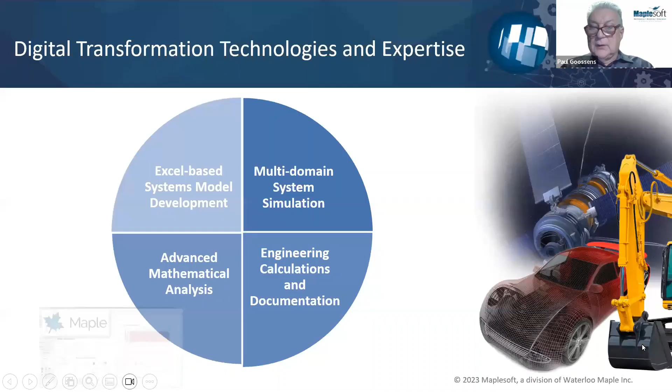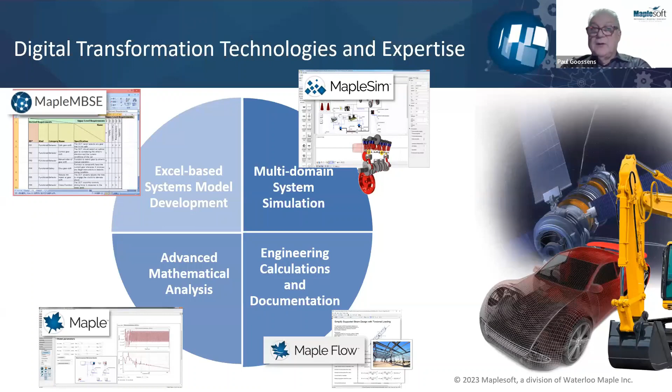So just to get started, I thought I'd start with a bit of an introduction to Maplesoft as a company in terms of its tools and also its expertise, because this is actually core to this presentation, that Maplesoft is more than just a product development company. It actually does have a significant number of software engineers, systems engineers that can help our customers to be successful with our tools. And certainly, that's kind of at the core of our engineering solutions capabilities.

So really, this discussion is going to be much more about how our technologies and our expertise can be used to get value from calculations, or managing calculations and analyses within your own organizations. Really, what we're talking about here is helping our customers to be successful in their digital transformation of their engineering processes through the use of our tools and our technologies, and of course our expertise.

Because we'll be touching on Maple and Maple Flow in this particular presentation, I just want to spend a little bit of time talking about what Maple is, and also talk about Maple Flow, because that's a relatively new product for us.

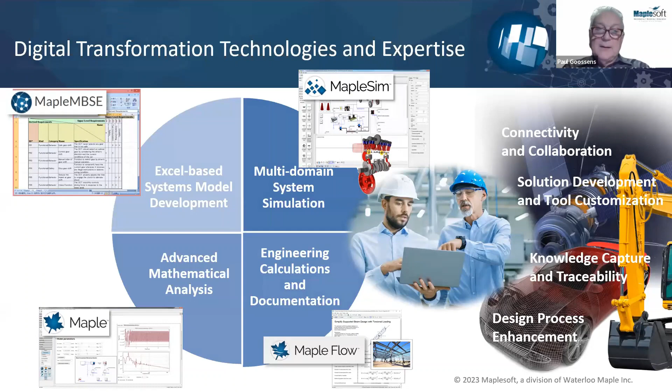Maple is our core technology. It's a powerful symbolic engine married up to a user interface that allows our users to turn mathematical concepts into solutions through the symbolic processing and manipulations of those expressions, to get them into a form that can then be executed by plugging numbers in. But the critical thing here is that you can actually capture the knowledge behind that solution all the way back to the initial principles, the initial relationships.

That's an important factor of our tools, and it's actually one of the things I'll be talking about a lot in this session. But it's much more than just a mathematical manipulation tool. Maple itself is a language, a programming language. It can be used to develop algorithms and routines that are very powerful.

You can combine that with user interface components in order to build deployable solutions that don't require the end user to know anything about Maple.

So really, we're providing an environment where you can go from basic principles right the way through to a canned solution that could be deployed either with Maple or through our web publication tools, Maple Cloud.

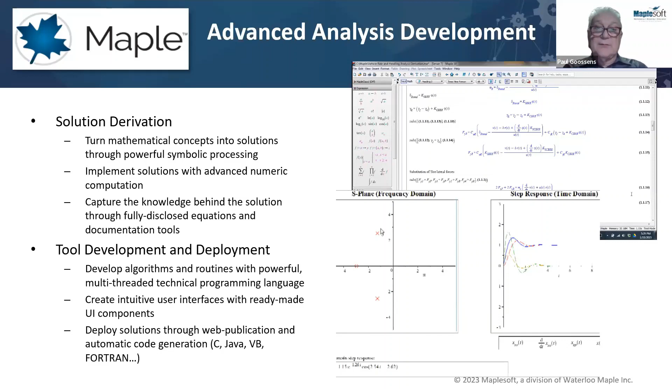Maple Flow is kind of the other extreme. It assumes that the equations, the expressions, are already derived, and it provides a sort of calculation document tool that allows you to place your expressions wherever you want on the page, and build up what are effectively live technical documents. Calculation documents, largely targeting our design engineers and scientists, who really all they want to do is take already existing equations and implement them in an environment that looks like a live design document.

I won't dwell too much on the details here, but the idea is that you can combine mathematics with text and graphics, and of course it still uses our very powerful dimensional analysis, dimensional units capability, to keep track of units throughout the calculations. Again, that's a very important factor for our technologies. And actually, under the hood, the Maple kernel is still there, so you can actually access a lot of the Maple power from within the Maple Flow document.

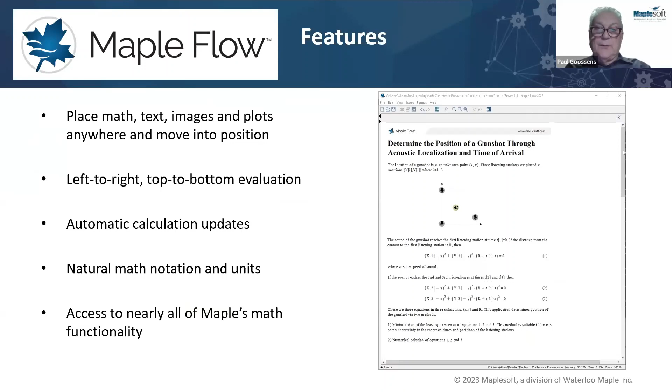So that's just to give you a bit of an introduction to what these tools look like, being used by many customers, engineers, and scientists throughout the world.

For many larger organizations, I particularly tend to get involved with some of the bigger companies that are very complex, designing complex products, and trying to understand what it means to integrate many of these processes together in order to achieve digital transformation initiatives in their business.

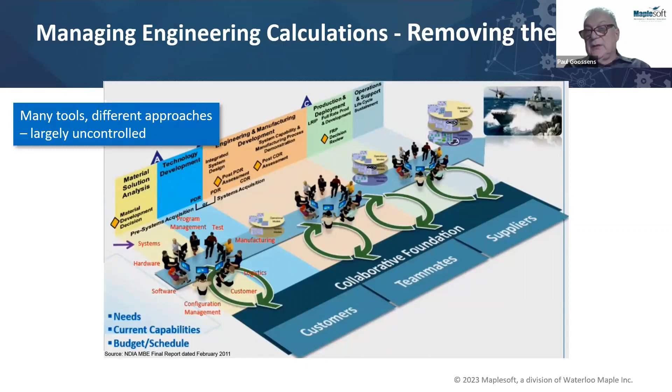And the big challenge there is that these organizations tend to get very siloed, with many different tools and approaches—largely uncontrolled. Most of the knowledge resides with subject matter experts, and that can easily be lost if that SME leaves the organization for whatever reason.

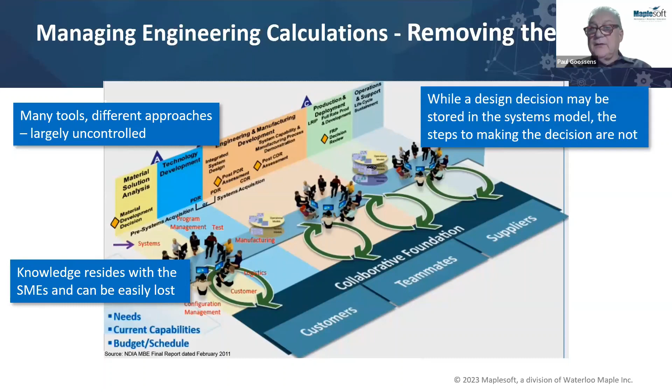The design decisions can be captured in many respects, typically in systems models, but the actual steps to getting to that decision are sometimes lost.

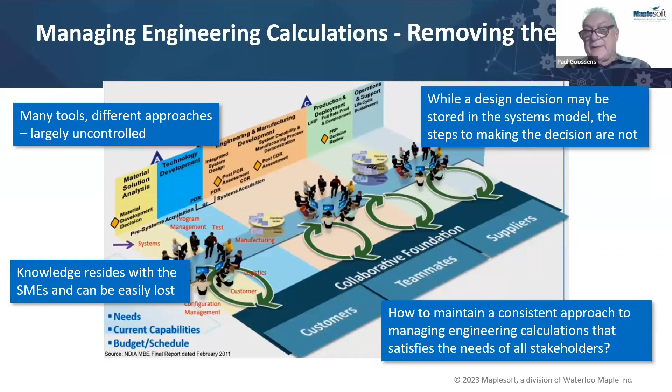So the challenge is, how do you maintain a consistent approach to managing engineering calculations that satisfies the needs of all stakeholders, because everybody has different interests and information gets siloed for a reason. Is there a way this can be managed that benefits all stakeholders? This is where we are coming from.

Certainly in the context of design calculations, which is the sort of expertise we've built our capabilities on, we get exposed to information coming from many different parts of the organization that need to be brought into the design calculation.

So these could be requirements coming from a systems engineering tool. They could be simulation analysis management coming from, say, a PLM system. It could be design parameters captured in a product data management tool, or even external information coming in from elsewhere in the supply chain. All of this has to be brought in and effectively tracked in order to create those calculations.

And then, once the results have been generated, how do you manage those results, and what generated those results? What were the circumstances for doing that? Any design decisions have to be captured in that way as well.

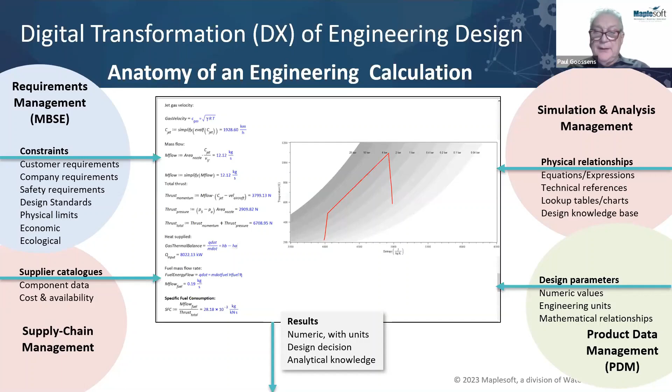So under the hood in our Maple technology, we have amassed a considerable wealth of capabilities that allow for tighter integration with other tools within your organization, whether it's file-based or databases, dedicated simulation languages, or just code. We can handle all of that.

The one I'm going to talk about more today is our online connectivity—our TCP/IP backend, and our recently launched Open API that allows us to configure the API for any REST-based web service. This is critically important to a lot of the activities we're involved in.

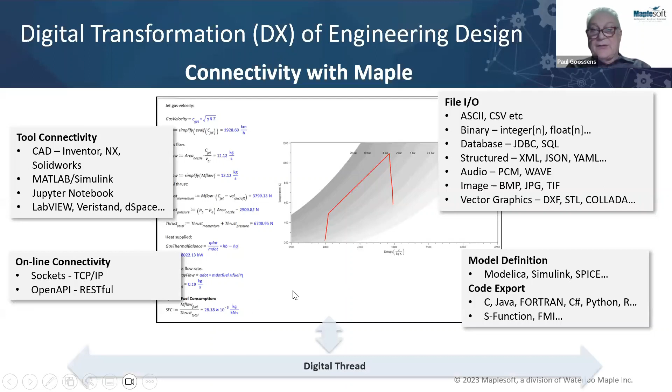What this actually means is that now we have a way of connecting all this information, all this capability, into the broader organization through what's often described as the digital thread. The critical thing is that the knowledge that went into developing all of this is now encapsulated in a way that can be deployed and reused within the organization. That's the goal of what we're trying to do here.

How do we do it? Well, we have this thing called Maple—Maple's kernel. We use it in our own tools as the mathematical engine, obviously in Maple Flow and Maple Sim, but we can use it for third-party tools as well. So we have the ability to integrate, for example, with Python, but also with MathWorks tools and so forth.

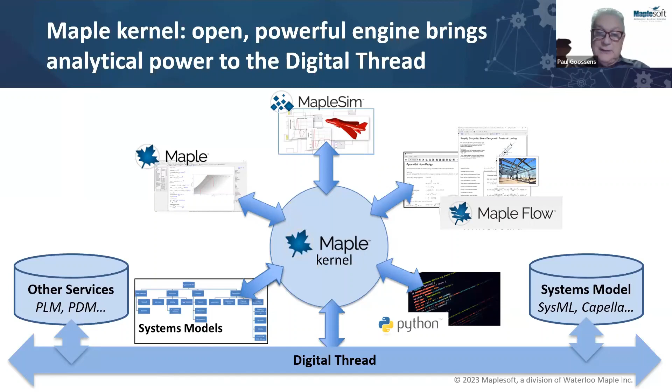What we want to talk about today is how we can tie that capability into systems models—into the architectural models created using languages like SysML and Capella. The reason we see Maple bringing value into this particular domain is that we can handle equations.

We can handle not just equations but expressions. We can combine them, simplify them, and causalize them, so you can determine what are the unknowns and what are the knowns much later in the process.

We can handle constraints and inequalities. We can actually do consistency checking, so we can see if there's missing data or inconsistent data that's going to cause not only an error in the calculations, but should be flagged as an error in the design.

And we offer a wide range of analytical capabilities. I'll be talking a lot about our units handling, because I think it's critically important that we can do this, and it's not just basic conversions. We are handling engineering units at the dimensional level. That means it's much easier for us to do conversions, but it's also really useful for error trapping. It's quite amazing just how many calculations actually deliver inconsistent dimensional units. So we use that a lot.

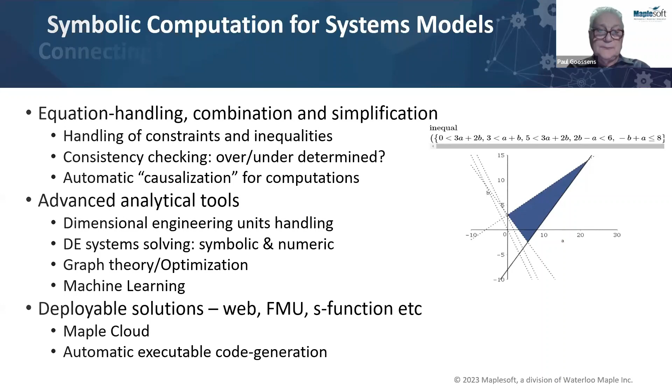Okay, so this brings me to the topic of today's discussion, and that is we have recently - I'll describe it as a soft launch - launched the Maple connector for SysML. This is an add-on library to Maple that allows us to interface the Maple engine to parametric information within the systems model. At present, we support Teamwork Cloud. We are exploring other MBSE platforms, and this is really the purpose of this presentation, is to start generating interest in how this tool could be used and what other platforms we should be considering.

As many of you probably have heard, there is a new implementation of SysML coming out, I'll say early 2024. We're looking very closely at that. There are some aspects of that which I'll talk about later in this presentation that actually make it a very natural fit for the kind of work that we're doing.

And just to close off this whole discussion of integrating with systems models, I do want to talk about the work that we're doing with Zuken and Vitech. So we have been working on an integration with their GENESYS systems engineering tool. We completed that early in the summer, and it's now being presented. It'll be presented at the Zuken Integration World Conference in Japan next week.

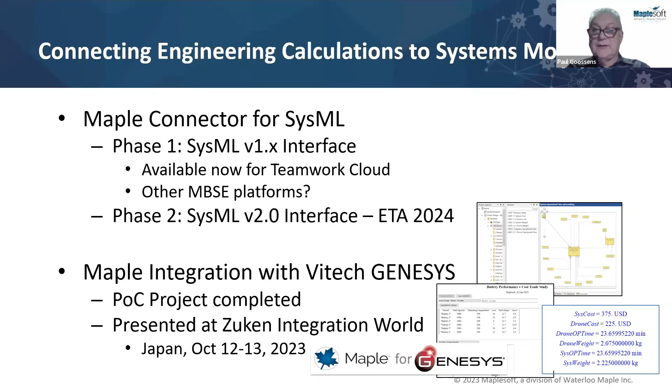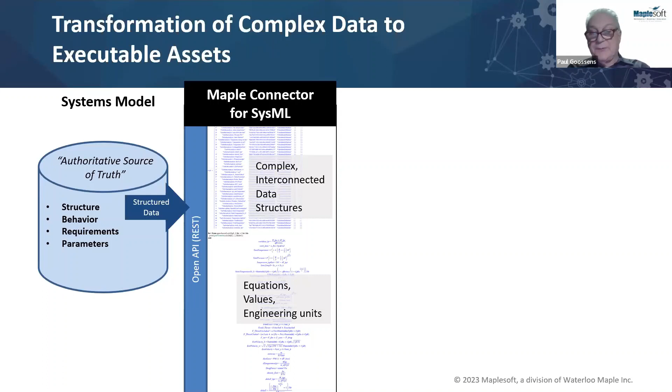So what do we mean by this? Fundamentally, what we're doing with the systems model is that we can access the structured data from within the source of truth, the architectural model. Typically this will be found in the parametric sections of the model. But the important thing here is that we can grab that structured data and then extract out any explicit expressions, any implied expressions, just in terms of what the structure of the model is telling us about the mathematical relationships that are in there. So there are some inherent mathematical relationships that we can derive from that. We can grab the parametric values and their engineering units.

And we can take this a step further. We can actually generate code from those expressions. But the important thing here is that we can turn these into what I would describe as executable assets. So now we're taking knowledge or information that's residing in the system model and turning them into something that we can actually perform some calculations with and make some design decisions from - whether it's equations going into the Maple Flow environment, or expressions that are going into the advanced mathematical analysis of Maple. Indeed, we can even extend this to generate Modelica models. We don't have that just yet, but it's definitely a possibility.

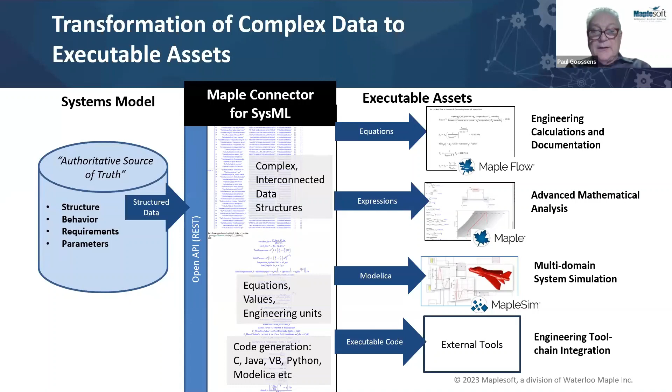And of course, we can take executable code, and that can be integrated into any tools beyond our own. So the idea here is that these assets can be extracted from the system model, some kind of analysis performed on them, and then conversely, we can take any results that come from those analyses and push those back into the system model, if it makes sense to do that. But now, really, certainly in the context of systems models, we have a very, very solid way of being able to integrate engineering data into the digital thread.

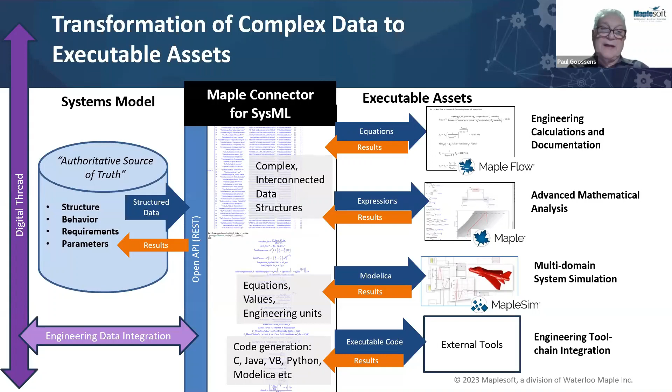I'll pause my presentation there for now and just show you what this looks like.

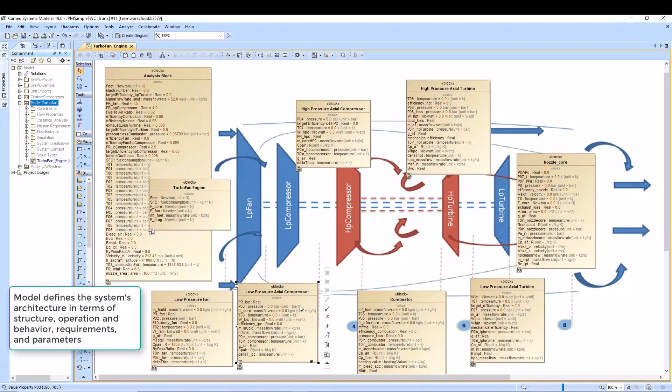In this demonstration, we're working with this system model of a multi-stage jet engine. This is how it appears in Cameo Systems Modeler, residing on the Teamwork Cloud server. It contains the system design in terms of requirements, structure, behaviors, and design parameters.

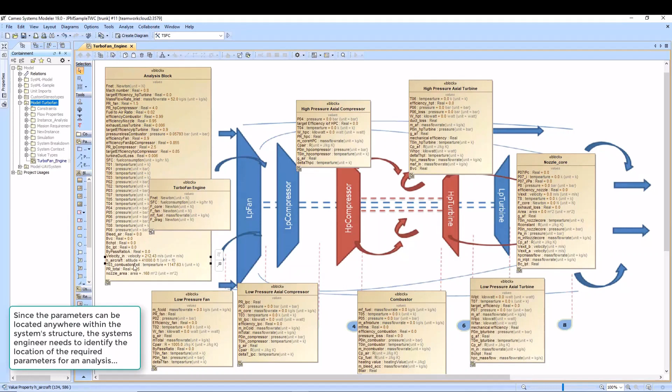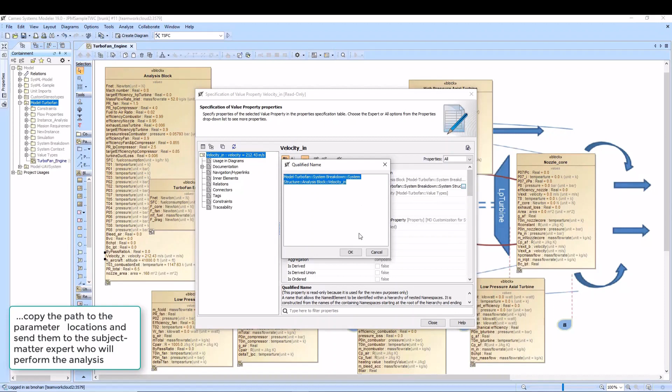These parameters are in the respective subsystems, and we're going to use these to perform an analysis in Maple. To do that, we need to know the location of each parameter from the systems engineer in charge of the model. The locations are found by inspecting the value properties for each parameter and locating the qualified name - effectively a path to the parameter - and each path can be copied and sent to the engineer doing the analysis. Now let's go to Maple.

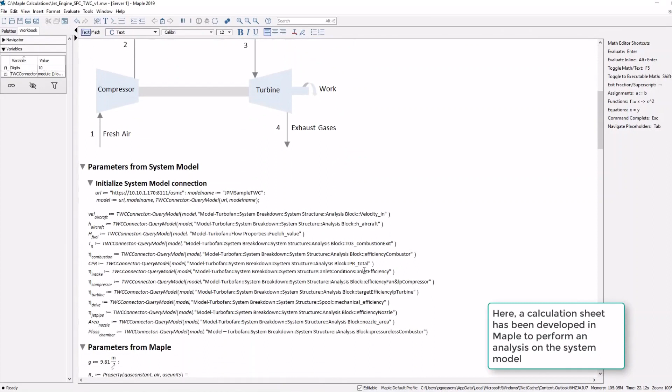Here we have a calculation worksheet developed to perform a thermodynamic analysis of the gas flow to determine the specific fuel consumption. First, we need to connect to Teamwork Cloud using Maple's SysML connector.

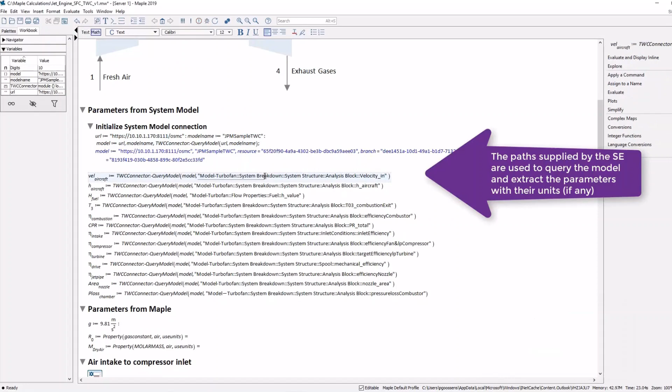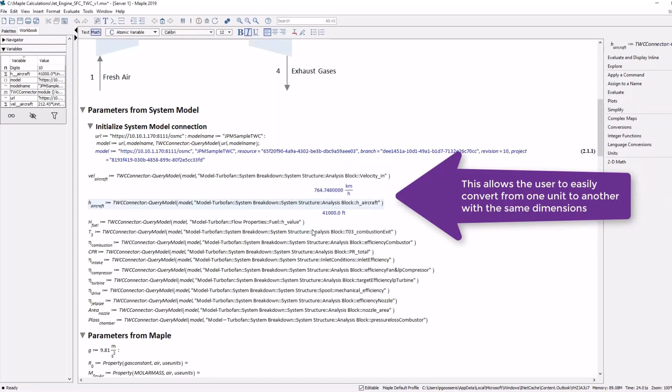We log in with our credentials, and then use the qualified name paths from the systems engineer to start extracting the parameters we need from the system model. Notice that Maple isn't just acquiring the numeric values, it's getting their engineering units too, so we can use Maple's dimensional analysis capability to support the use of units throughout the calculation. We can convert to different units if we wish, but the important thing is Maple maintains dimensional integrity throughout - not just for unit conversion, but also for spotting errors and fixing them.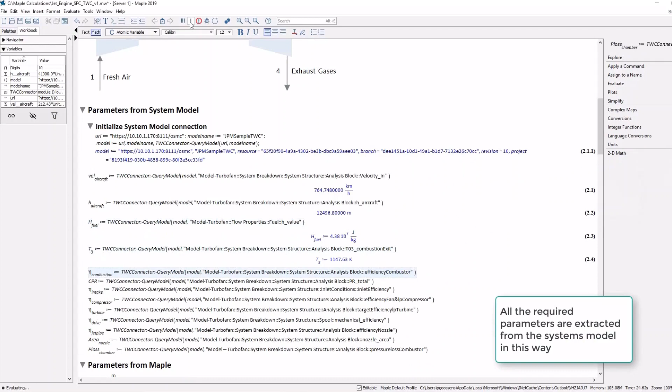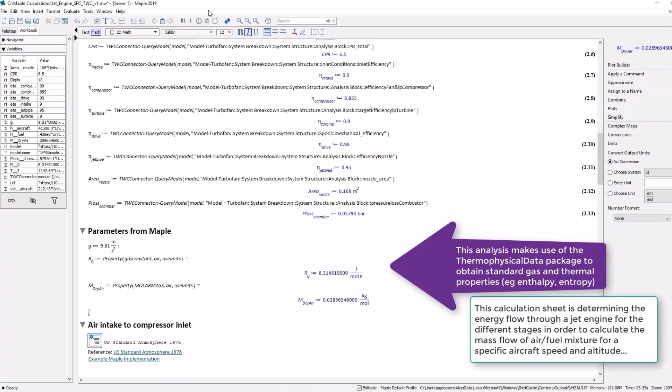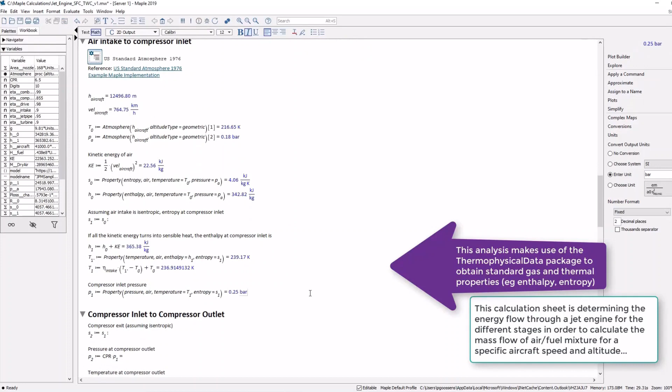Once we have all the parameters from the system model, we can start the analysis. In this example, we're determining the mass and energy flow at each stage in the engine, using Maple's thermal properties library to help us. Given the internal energy and air-fuel mass flow at each stage, we can calculate the amount of fuel required to maintain the aircraft speed and altitude.

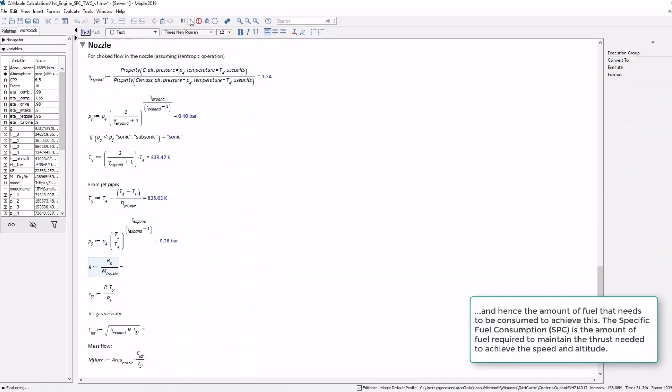From this, we can calculate the specific fuel consumption - the amount of fuel required to deliver a kilonewton of thrust. This is our measure of performance that we use to make sure the engine complies with the design requirements.

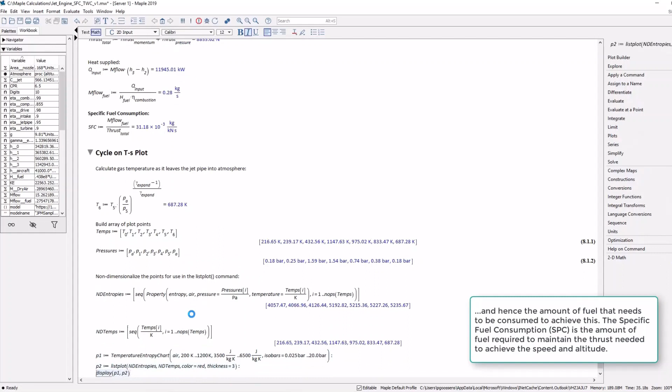To finish off, it's useful to visualize the energy states at each stage in the cycle on a temperature-entropy chart.

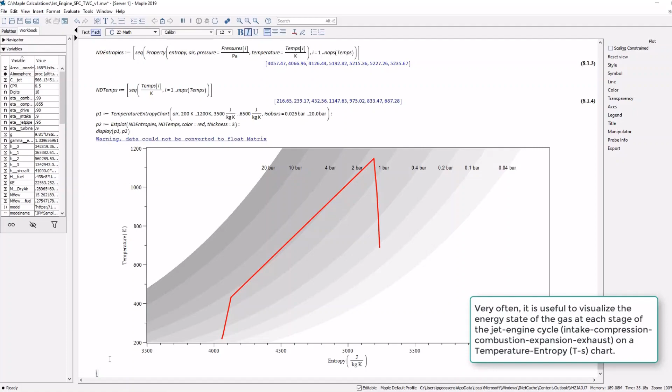Now we have a design sheet that's fully integrated with the system model. If any changes are made to the system design, we can quickly recompute the SFC and flag any issues that might arise from these changes.

So this is one use case we've been playing around with - can we create design worksheets that take parameters from the system model? And indeed, this is what we've done here.

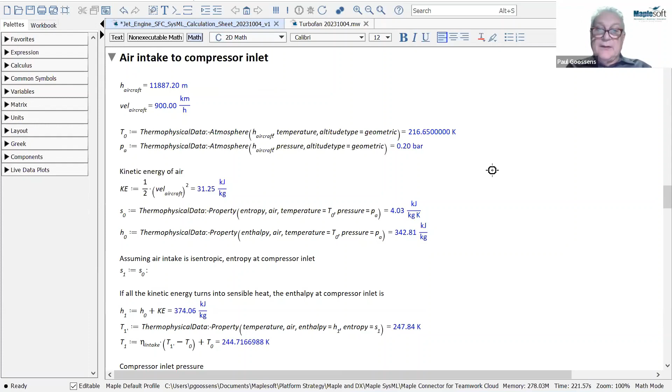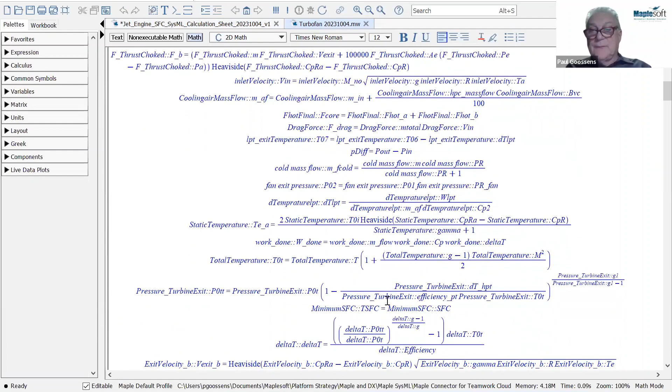We can take this a step further and actually extract any equations, any expressions that reside in the system model. We can then combine these together and execute some kind of calculation. There's a lot of heavy code in this, but it's really just to give you a sense of what can be achieved with all of this.

And then at the very end, we have the results we're looking for. So we can automate this whole execution without really having a design document - just have this as a way of executing the calculations over and over again.

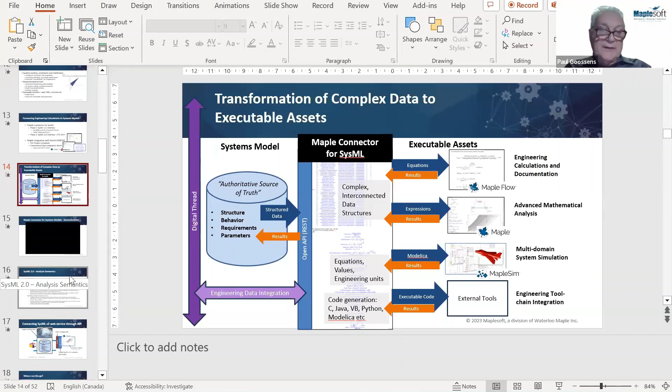So that's really what we're proposing and what we're working on. The idea is to get people thinking about how we can use our technologies to extract structured information and turn that into something that can be turned into calculations. One of the reasons that's driven us to this is actually the activity around SysML2.

I'm just going to go back to my presentation. One of the extensions to SysML2 is the ability to capture analysis semantics.

I'm not going to go into the details here, but this is just an extraction from the standards definition, and the goal really is that anything pertaining to a calculation for some measure of performance can be encapsulated in the system model - defined in terms of what the analysis objective is, what kind of model you're going to be using, and how those properties are going to be handled or managed within the SysML2 model.

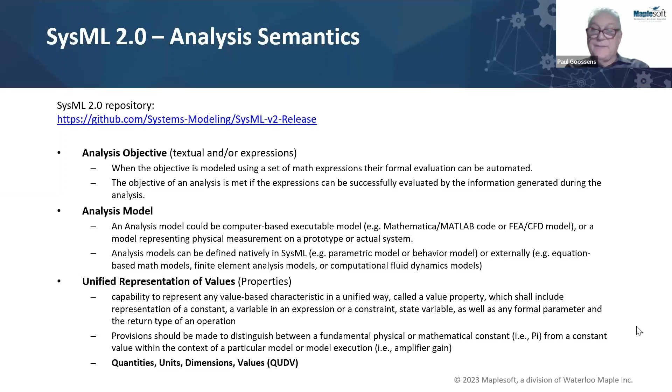We think this is an exciting development, and we've been part of the SysML2 definition team to make sure we understand what is required for when customers start to use SysML2 within their own tools, which will largely be determined by when the vendors make SysML2 available. But we're already experimenting with this. We've already built some prototypes and presented them, generating a lot of interest.

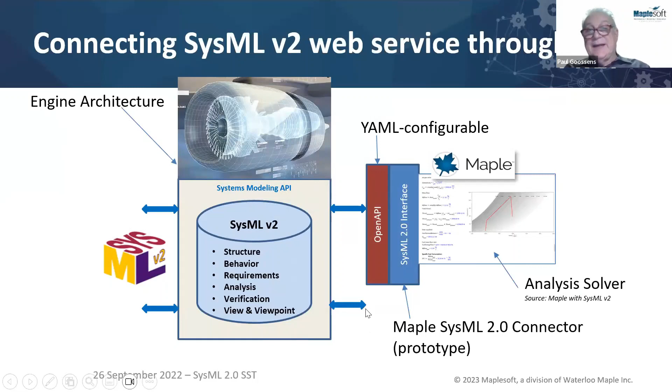That was my slide, just to say that we actually do have a connector prototype that we've been playing with, and again there are some demo videos that I can point you to on that.

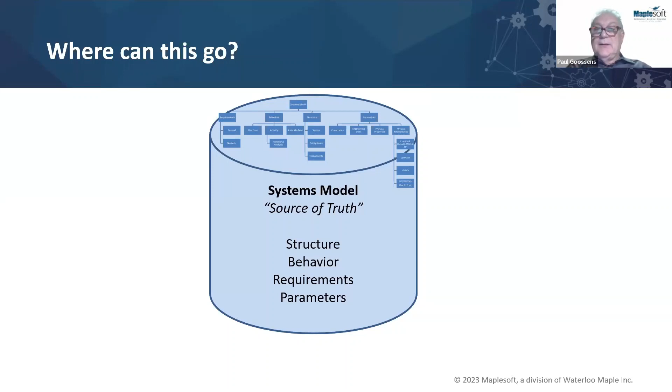Just to wrap this up, where can this go? From our perspective, we see that there's a need for this capability in the models. We're already experimenting with the Maple connector and with the SysML connector, and you've seen, certainly in the context of Vitech GENESYS, that there seems to be a growing need for integrated analysis capabilities within the architectural tooling as well.

So this could be a very interesting area to be developing with other systems tool vendors.

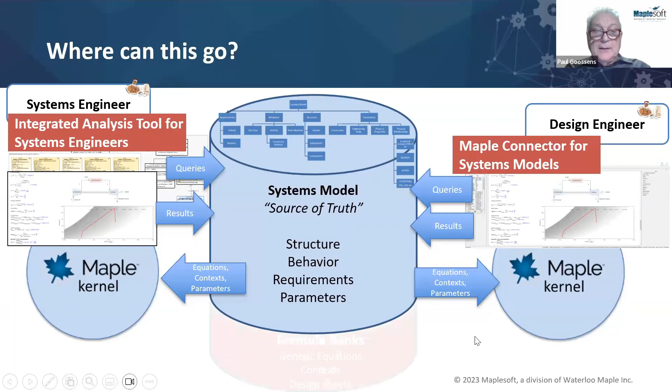But from our perspective, I think what is going to be really exciting is the fact that customers can create their own libraries of formulas, of expressions, of computations, and tie them into the systems model and actually capture the semantics—what are these things going to be used for within the systems models?

So there's potential here for internal design manuals to be implemented as systems models. From our perspective, we see potential for commercial libraries, standards libraries, and so forth, that could reside in the systems model and then be implemented using our technologies.

And I think we could even see this going a step further, in the sense that not only does Maple become a consumer of all this information, but Maple could also be used as a tool for authoring that information to reside in the systems models. So we see that this could be a very exciting development in the systems engineering world.

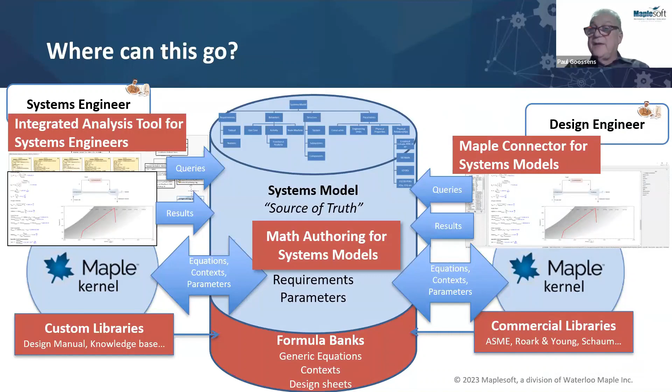So that's really where we feel this can go in terms of next steps. What we'd like to do is engage with some lead customers to understand how they could see technology like this being used.

Why us? Well, we do have a lot of experience in this. We've done a lot of development work, either solution development or software development work. We can provide everything from a bank of equations to a turnkey solution, and of course we see this as a way of driving return on investment.

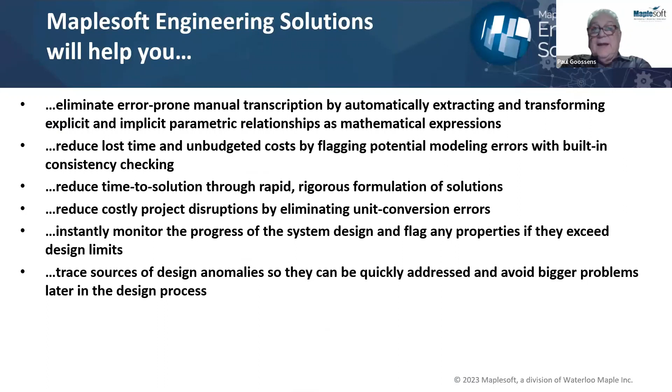In terms of where we can see this going with the connectivity between the systems model and our analysis tools, we can really help organizations eliminate a lot of the churn—unbudgeted costs, disruptions that are typically built into the process. We can smooth a lot of that out and help customers improve time to solution.

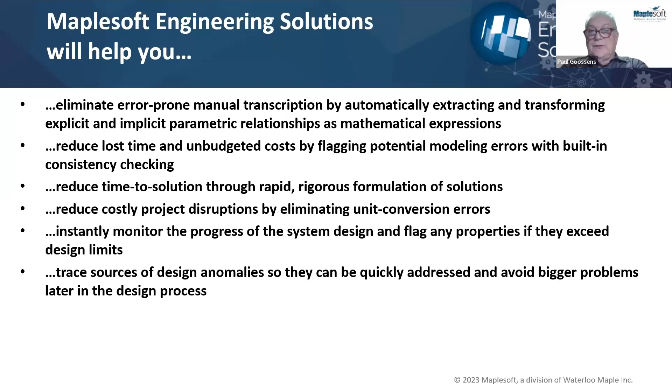There are many different ways and many benefits to bring value to the process, and overall it just helps to maximize the return on your calculation and analysis tools.